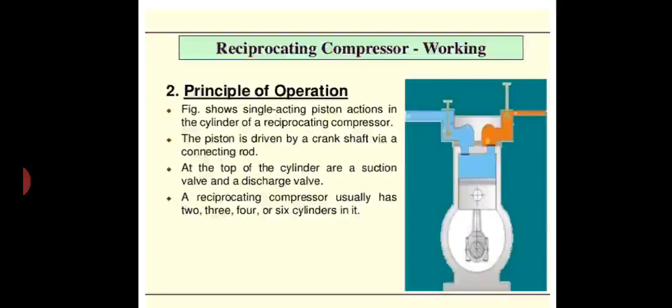Now the actual working of the reciprocating air compressor we are going to discuss. In the first diagram you can see the colored portion is the inlet valve, where air from the atmosphere is sucked through the strainer, and the contaminants present in the air are arrested, and the pure air is introduced inside the piston cylinder arrangement.

And when the compression starts, this is the suction action, and when the compression action starts, the piston moves in the upward direction. During this upward direction compression takes place, and the compressed air will be stored inside the storage tank.

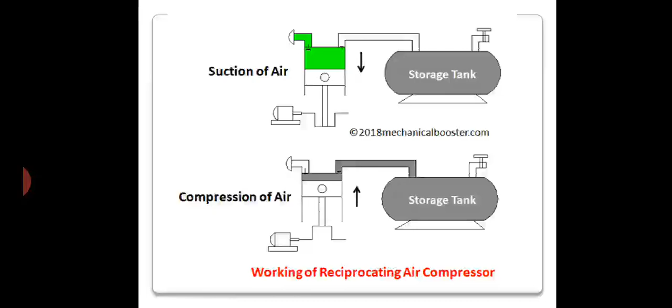Now the valve position: at the suction stroke you can find the suction valve open, but at the same time the delivery valve is closed. At the compression action, the inlet valve is closed and the exhaust valve is open. So this is the simple working of the reciprocating air compressor.

Now we are going to discuss the positive displacement compressor. The compressing element, that is the piston or vane type, displaces air positively from the suction to the delivery. In a reciprocating air compressor, single acting reciprocating compressor, only one side of the piston is functional, meaning from only one side there is suction, and after that there is a compression action. So the discharge of such cylinders is not continuous, it is intermittent.

But in case of the double acting cylinder, you find both sides of the piston are functional, so you get continuous discharge of the compressed air.

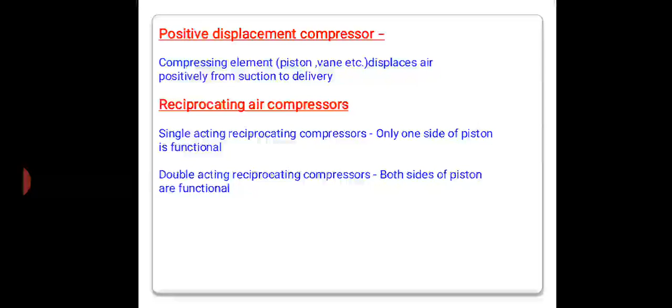Now we are going to see the single acting reciprocating air compressor. This is the functional element. You can see the water jackets we are providing at the top and at the sides of the wall for cooling purposes, because we have to increase the efficiency of this air compressor. Whatever heat is produced inside the air, we have to remove that heat. So to provide the cooling effect, we are providing the water jackets. You can see the piston and cylinder arrangement is also shown here.

Now at the suction side you can find air from the atmosphere is introduced inside the piston cylinder arrangement. Here we have shown the clearance volume and also the swept volume. Swept volume means the topmost position and the bottommost position; during this range, how much volume is handled by the piston cylinder arrangement is the stroke volume. The clearance volume is the volume where there is always presence of air, above the swept volume. Whatever volume is present above the top position of the piston cylinder arrangement is called the clearance volume.

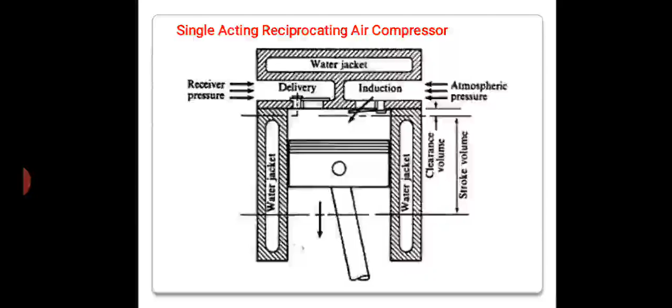Now during the suction side, the air is induced inside the piston cylinder arrangement and it compresses, and when the compression action takes place it departs from the delivery side. This is the receiver pressure you can see, and the delivery side delivers the high pressurized air. This is the functional diagrammatic representation of the single acting reciprocating air compressor.

Now we are going to see the terminology of this piston cylinder arrangement and all the parts of this compressor. In the single acting reciprocating compressor, you can find the inlet is provided here, and the valve through which there is suction of the charge inside the piston cylinder arrangement is called the inlet valve, and the tubing from where the charge, meaning air, is introduced inside this piston cylinder is called the inlet pipe.

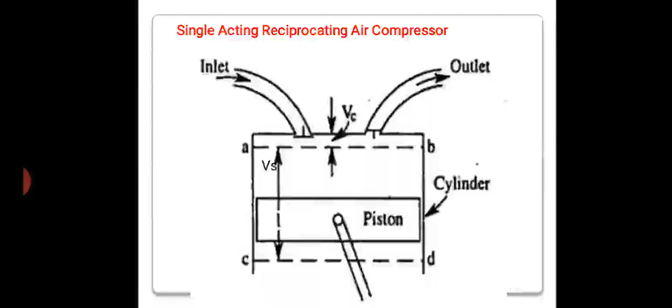Now the volume that is present above this AB position, when the piston reaches this position, whatever air is present above this position is called the clearance volume, and we indicate this clearance volume by VC.

Now the exhaust valve: at the exhaust or outlet position, the valve which delivers the compressed air is called the discharge valve or outlet valve, and the tubing which provides the outlet for the compressed air is called the outlet tubing.

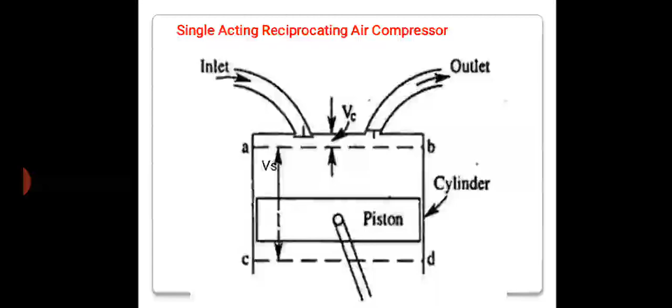And the AB position and the CD position, the volume present during this span is called the swept volume, and on the outside it is the cylinder, with the piston shown by this rectangle. So this is what we call the compressor terminology.

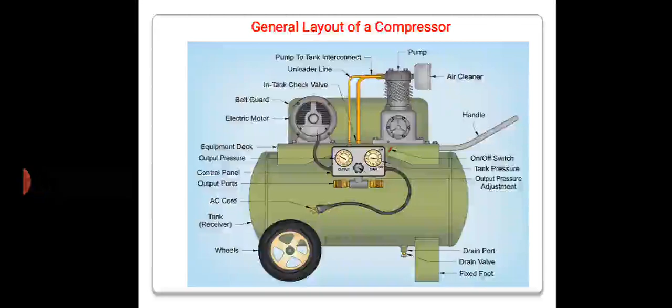Now we are going to see the general layout of the compressor. Here you can see the general layout of the compressor.

An air cleaner is provided. When suction starts in the piston cylinder arrangement, air is sucked inside the compressor, compression starts, and after compression the air is delivered into the receiver tank.

At the receiver you can find a drain port or drain valve provided. When there is any moisture present in the air, to remove that moisture content we open the drain plug and remove the moisture present in the air.

For this we have also provided the fixed foot. This compressor is driven with the help of an electric motor and a belt arrangement. To this belt drive, a belt guard is provided for protection, and a handle is provided to move the compressor from one position to another. All these equipments are mounted on a flat set, the equipment deck.

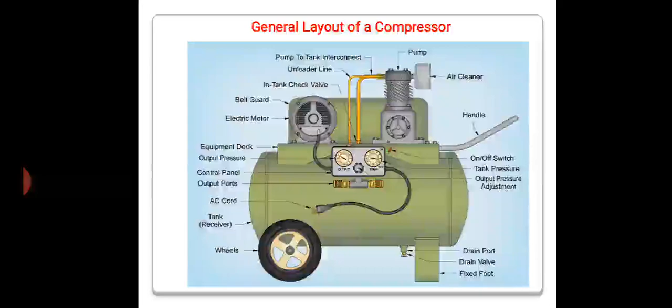Now this is one more pictorial view of the air compressor. You can see the electric motor, the compressor, the air filter, and the high pressure storage tank which stores the air, with the belt drive used to drive the compressor.

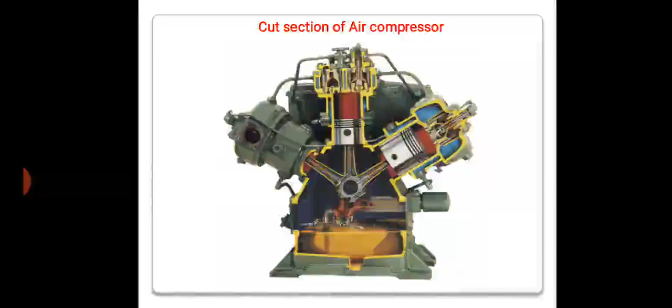You can see the electric motor shown, and for intermediate connection we are supplying the discharge of one cylinder to the suction of another cylinder, one cylinder's discharge going to the suction of the other. This arrangement is shown in this cut section of the air compressor.

Rotors with more than two lobes are sometimes used when an increase in the pressure ratio is required. A small clearance between the lobes and the cylinder surface is maintained to prevent wear. However, due to this clearance there are internal leaks, which reduces the volumetric efficiency.

If gas is taken at the intake at a certain pressure, as the lobes rotate, the mass of gas equal to the volume corresponding to each lobe is found on the receiver side. At this instant some high pressure gas rushes back from the receiver and mixes with the volume V until the pressure is equalized. This process is known as the backflow process.

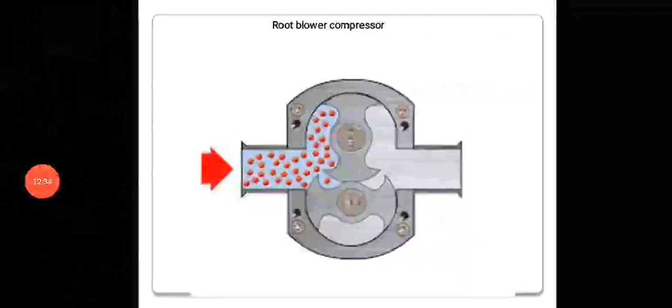The advantages are that root blowers are designed to deliver compressed air in the range of 0.5 cubic meters to 1400 cubic meters per minute at a pressure up to 2 bar. These blowers are rugged in design and operation, with negligible lubrication oil consumption, but they are incapable of producing high pressure ratios.

The volumetric efficiency is found to decrease with increasing pressure ratio and speed.

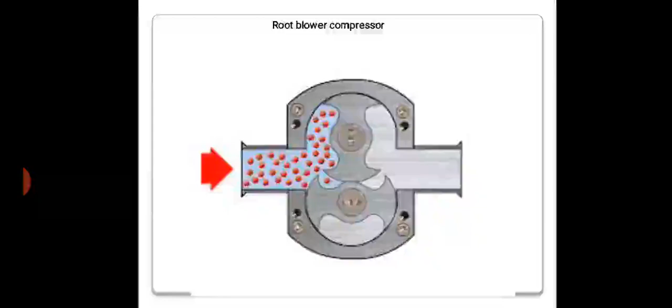Next we are going to discuss the vane type compressor. It consists of spring loaded vanes mounted in the slots of the rotor. The vanes are usually made up of non-metallic fibers or carbons. The rotor is mounted eccentrically inside the casing.

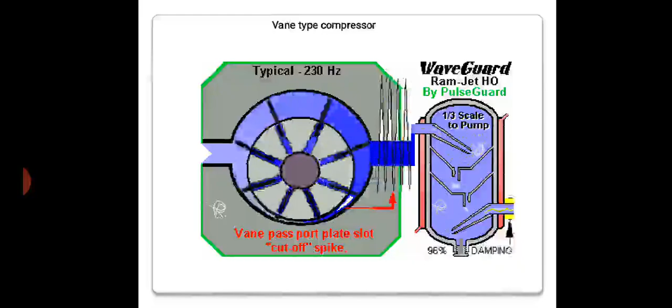The inlet port opens to a larger area compared to the delivery side port. As the rotor rotates, the freely sliding vanes extending radially from the rotor axis are projected due to centrifugal force to meet the inner surface of the casing. It forms airtight pockets, and considering anti-clockwise rotation, air from the atmosphere at pressure P1 is trapped between the vanes, equal to the volume being considered.

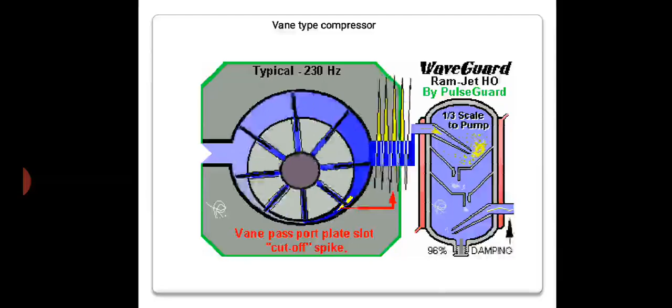The atmospheric volume is sucked inside the gap, and with rotation of the rotor, the trapped volume is compressed until it communicates with the receiver side. Since the receiver pressure is higher than the compressed air between the vanes, backflow of air from the receiver takes place, causing further rise of pressure internally.

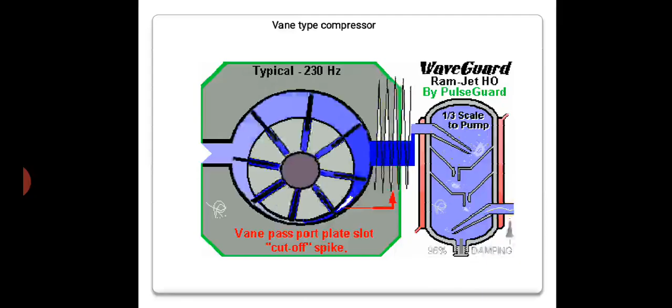The internally compressed air rises in pressure until the pressures equalize. So in the case of this compressor, the total pressure rise is partially due to internal compression between the vanes and partially due to backflow of air. Keep in mind, in the case of the vane blower, the total pressure rise is partially due to internal compression and partially due to backflow of air. This is related to the vane type compressor.

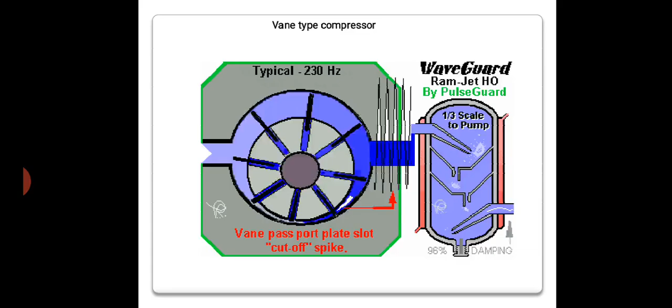It needs less work of compression compared to the roots blower, for the same flow rate and pressure ratio as in the case of the roots blower. The volumetric efficiency of the vane blower ranges between 60 to 70%, due to leakage affected by machine size and the pressure ratio obtained, and the speed of this blower should be limited up to 3000 rpm.

Next is the screw type compressor. In this figure you find that the screw type, or helical rotary compressor, is a positive displacement type of compressor. It consists of two mating helical lobed rotors.

These lobes rotate intermeshed with very small clearance. The male rotor, having 3 to 4 lobes along its length, is usually the driving rotor, and it meshes with a similarly formed helical lobe, the female rotor, having 4 to 6 lobes.

During rotation of the rotor, air is drawn through the suction port to fill the space between the male and female rotor lobes. Since the air drawn between the lobes is isolated from the suction port, this trapped air is moved both axially and radially with the rotation of the rotor, and is compressed due to volumetric reduction, as the lobes of the compressor progressively reduce the space occupied by the air.

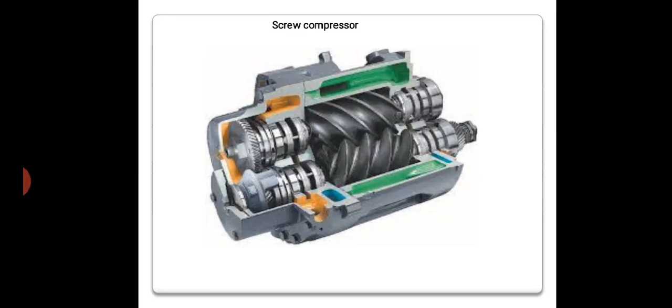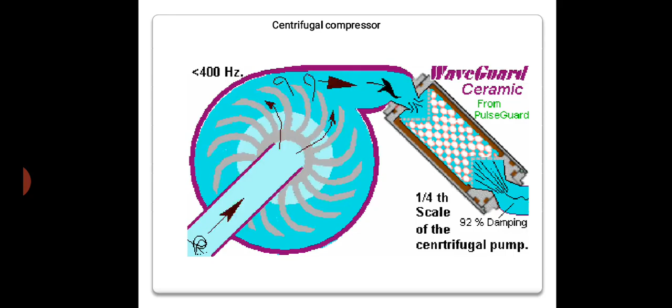So the compression of the air takes place due to centrifugal action. This kind of compressor is called the centrifugal compressor.

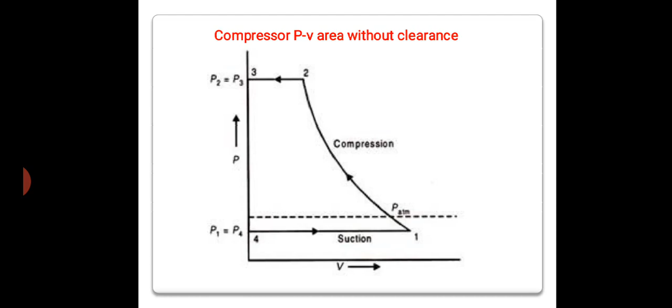So the isothermal compression process is considered the ideal process because the work input required is minimum. Thus the best value of the index of compression, n, is equal to 1. However, isothermal compression is not possible in practice, since the heat needs to be dissipated corresponding to the temperature rise during compression.

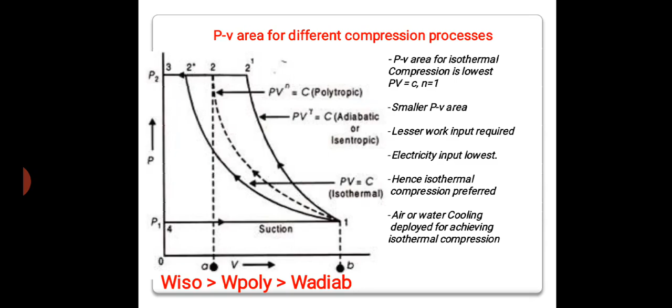Now we are going to discuss the PV and TS plotting during the isothermal, polytropic, and isentropic processes. The suction and pressure are the same in all cases, but the compression action differs. During the isothermal process, following the C1 point, the temperature remains constant and the entropy gets reduced.

Next, for the polytropic process, on the PV plotting from C, the area under the curve increases, and there is an increase in temperature with a decrease in entropy. This is the polytropic process.

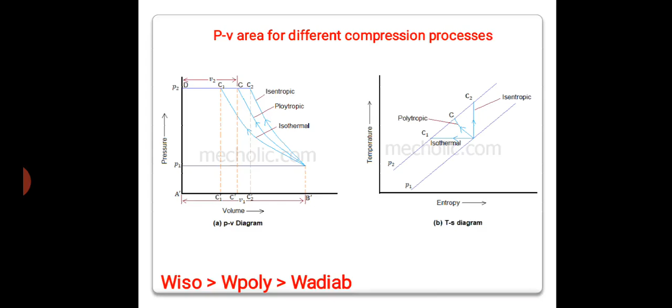In case of the isentropic process, at C2 on the PV plotting, the area under the curve is increasing, but during this process the entropy remains constant, though there is an increase in temperature. This gives a clear idea about the work done during the isothermal, polytropic, and adiabatic processes. Today we have discussed the various types of compressors, compressor terminology, and the differences between the various types of compression processes.